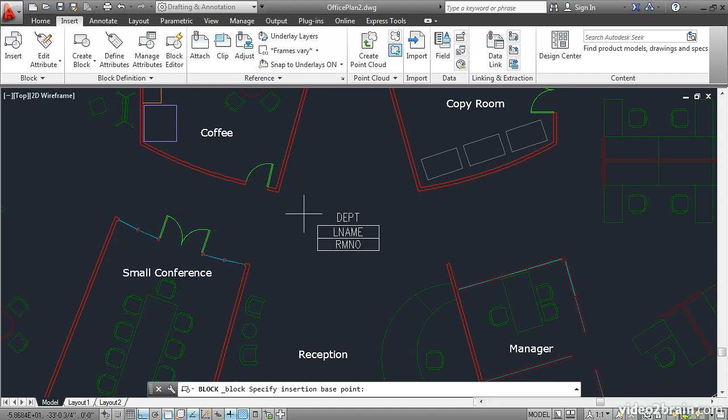Before we define this as a block, let's go ahead and set the current layer. Click on the Home tab, open the Layers drop-down, scroll down and select Tags to set this layer current. Then go back to the Insert tab and click Create Block. Type the name Room Tag and then specify the base point by picking a point and snapping it to the midpoint here.

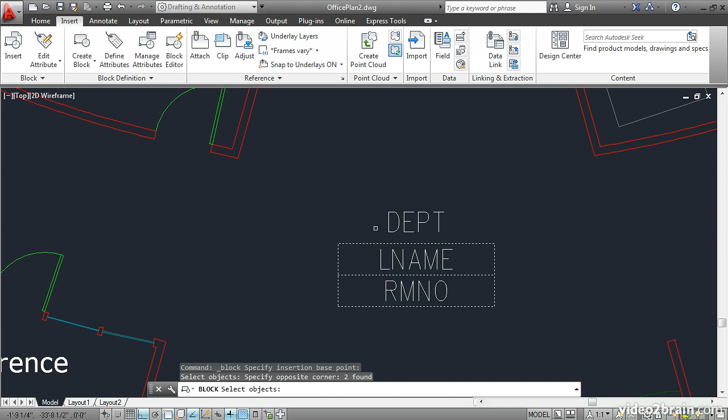Then select the objects. I'll select both rectangles, and then the order in which you select the attribute definitions is significant. This will be the order that they appear in the attribute editor. So I'm just going to select them from the top down. 1, 2, 3. Enter. Choose Convert to Block and click OK.

You're immediately presented with this Edit Attributes dialog box, where you can input attribute values. We're looking at the defaults right now that were set up in the attribute definitions. General and 1500 are those defaults. Now we can change these values to anything that we need to. So right now this particular tag is in the reception area. So general is a good description for that department.

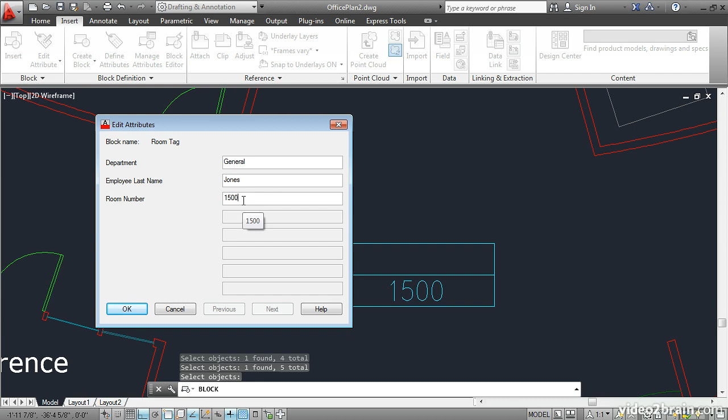The employee last name will refer to the receptionist. I'll click right here and type Jones. And then the room number will be 1501. OK. The values appear in the room tag. Let's insert another room tag. Scroll over here, and let's place a room tag in this manager's office.

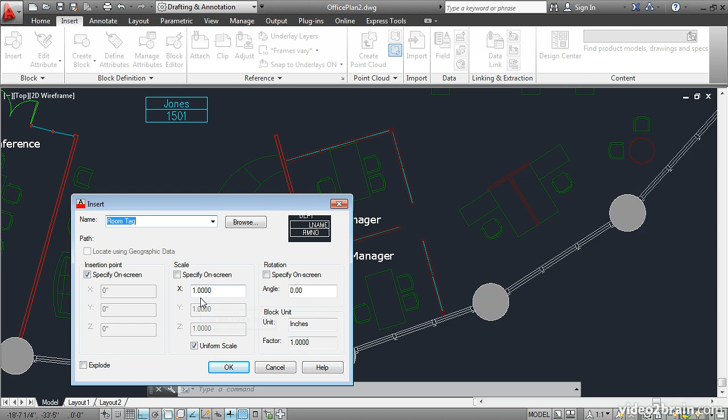Click Insert Block, choose the room tag, specify its insertion point on screen, and leave the scale and rotation angles at their defaults. Click OK, and then click in this manager's office someplace to set the location of the room tag. Notice on the command line it says Department, and it gives us a default of General.

In this case, I'm going to change that to HR for Human Resources. I'll press Enter, and then I'll type the employee last name, Gonzalez. Enter, and the room number is 1502. Enter. Let's do that again, but this time I'm going to change a system variable.

Type ATTDIA and press Enter. This stands for Attribute Dialog Box, and it's a very simple system variable. It's either off or on. It's off when it's set to 0, and it's on when it's set to 1. So let's turn this on by typing 1, Enter. Now this is really just a matter of personal preference. The difference you'll see in a moment.

Insert, room tag, OK. Click right here, and this is the difference. Instead of being presented with these queries on the command line, you're given this information in a dialog box interface. So if you like this, go ahead and set ATTDIA to 1, and if not, just leave it set to 0. This particular manager is also in the HR department.

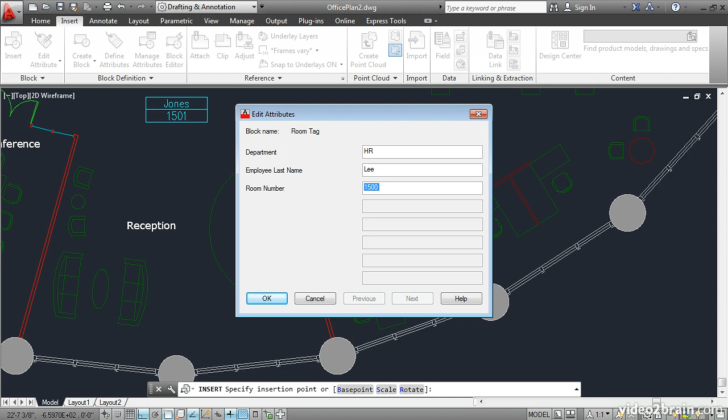I'll press Tab to move to the next line. Their last name is Lee. Press Tab, and the room number is 1503. OK. Let's say that I just realized the employee name is incorrect. I can easily change that by clicking Edit Attribute. This uses the EATTEDIT command, which stands for Enhanced Attribute Editor.

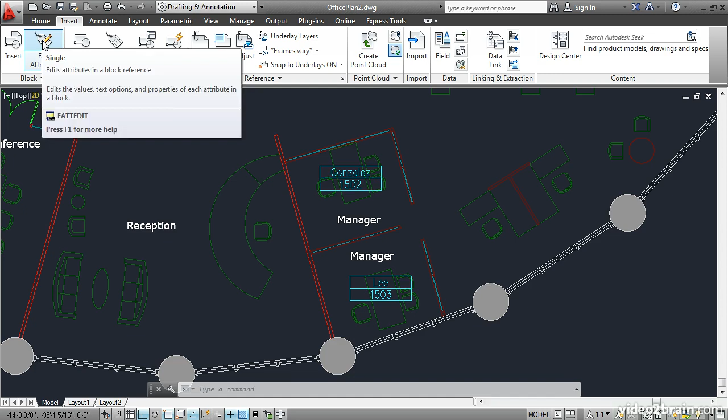I'll click the button and then select the room tag. This brings up the dialog box where I can select the relevant attribute definition and then go ahead and change the value. This is going to be Billy. Okay. I'll pan over and zoom out a bit. Let's add another room tag to this open office space. Insert, room tag, OK. Click right here.

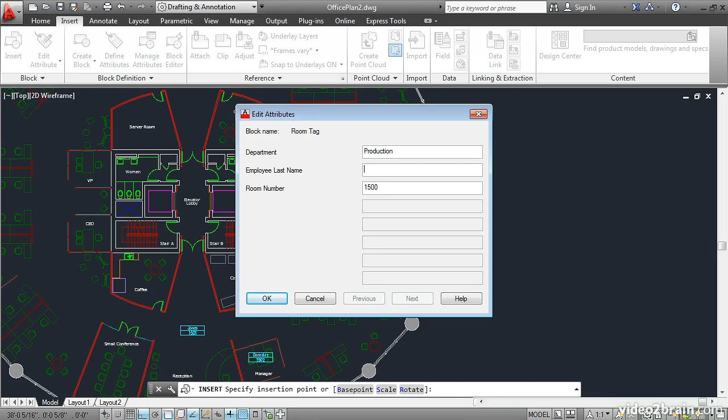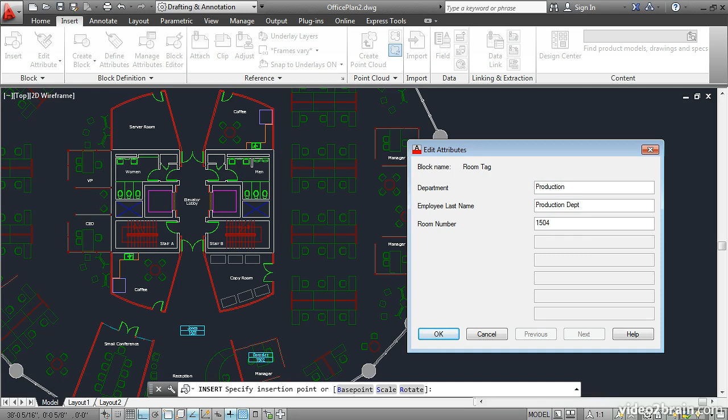The department here will be Production. Press Tab to move to the next line. Now here we have lots of different people working in this open office. All these workstations are in the production department. So for the employee last name, I'll type in production department, like that. The room number will be 1504. Okay. Now we have a problem.

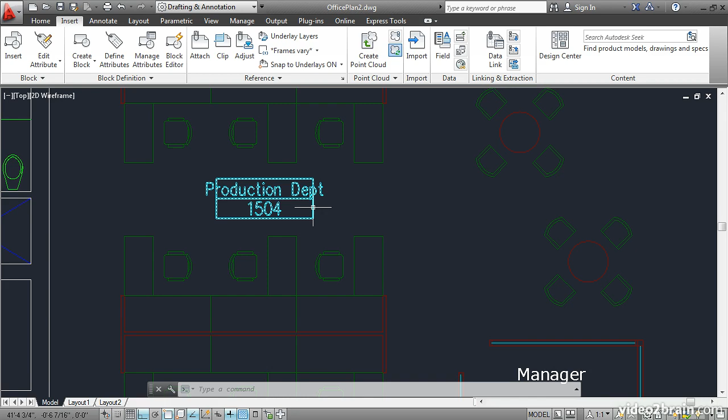Let's zoom in. It doesn't quite fit in the rectangle that was designed in this room tag block. We can fix that by either abbreviating the value that I just entered or by compressing it in width. I'll take the latter approach. You can trigger the Enhanced Attribute Editor simply by double-clicking on an attributed block. So that's a little shortcut, so you don't have to go up here and use this tool every time.

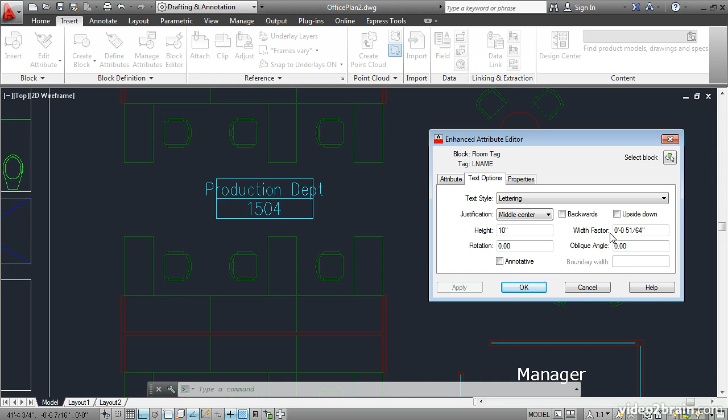Now, in this case, I need to change the width of this particular value. I'll select this line, go to Text Options, and change the width factor. Let's try 0.6. Press Tab, and you see the effect on screen immediately. That looks good. I'll click OK and zoom out. That only affected that individual room tag. You can see that these other attributes look the same.

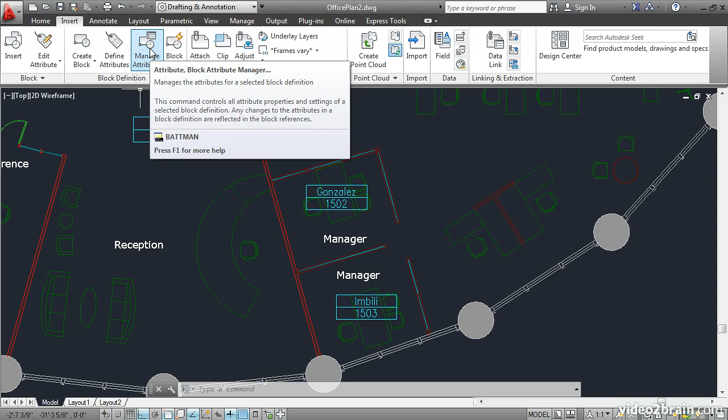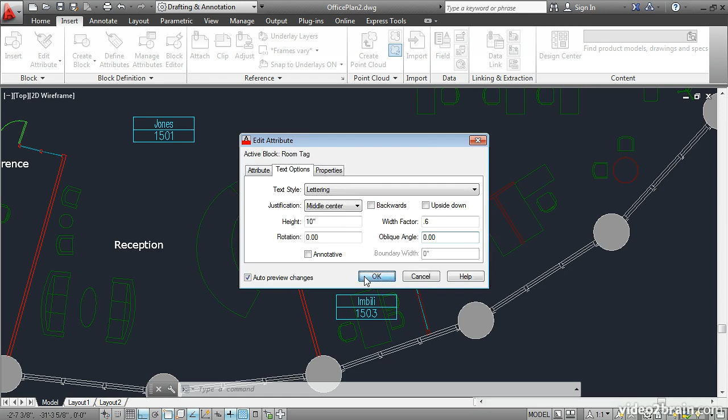If you wanted to change the width of all of these attributes, you can do so using this tool. BATTMAN is the command name. It stands for Block Attribute Manager. Click the button, select LName, and then double-click. That opens up another dialog box where you can access text options. Here, I'll change the width factor to 0.6. Press Tab, and if you notice, all of the attributes changed in each one of the room tags. So this is a global edit. I'll click OK, and OK again.

So you've learned how to include attribute definitions in a block, and how to enter attribute values as you insert blocks. You've also learned how to change the width of attribute values one at a time, and globally at the attribute definition level, using the EATTEDIT and BATTMAN commands.